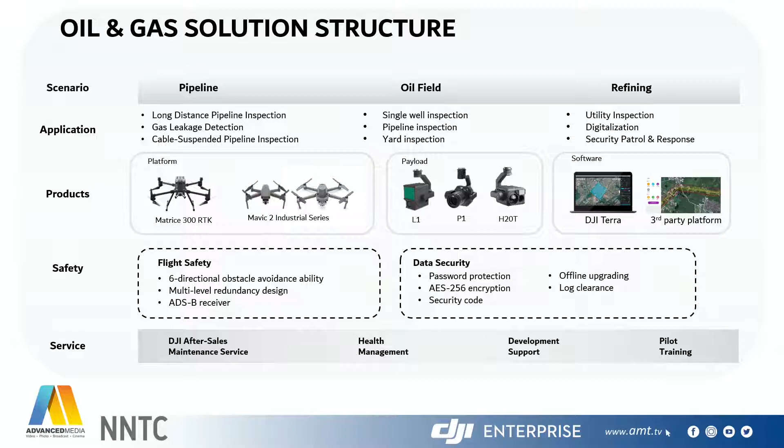So in these different solutions that we will be covering in the oil and gas field, we all know that there is a lot of scenarios that the drone can cover. So mainly we'll be focusing on one platform, which is the Matrice 300 RTK, that comes or that it's compatible with a lot of different payloads or sensors or cameras. And as well, we will be covering the different softwares, for example, the ones from DJI Terra for data reconstruction, and the one my colleague Pavel will speak about is Atlas, and UgCS.

Pavel, what is Atlas? Or UGCS in general?

Sure. So if we speak about two products which we actually use in drone solutions, there are two pieces, as you mentioned in the beginning. One is intended for flight planning and automation - that's the product called UGCS. It's a universal ground control station which allows you to pre-plan the flights in detail, and then in the field the pilot can execute the flight. The solution is centralized, so it can be used among big organizations with a lot of drones in operation at the same time. It also provides real-time video streaming to the command and control center to make sure supervisors can sit comfortably in an office and supervise what is going on in the field during operations.

And if we speak about the second piece, which is usually forgotten every time we speak about drones - once we collect the data, that can be a lot of data. Now the question is how this data will be processed, how we can quickly react on what we collected from the field with the drone. That can be a daunting task, because sometimes a drone lands and you have 15,000-20,000 images collected from the inspection object. So Atlas is an AI platform which basically allows you to process the images, stitch them into maps, and then detect particular anomalies on these images.

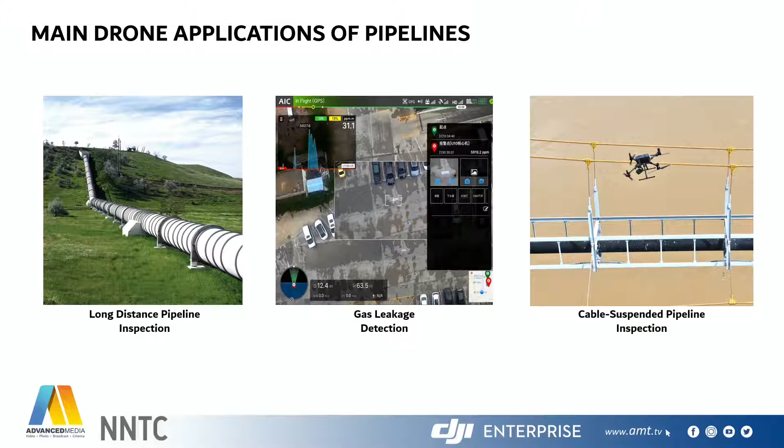We can have drone inspection to prevent any leakage from happening, thus preventing any natural disaster from oil leakage that can happen from the pipes. We also have gas leakage detection solutions, and in some cases pipelines are suspended like a bridge if there is a river crossing.

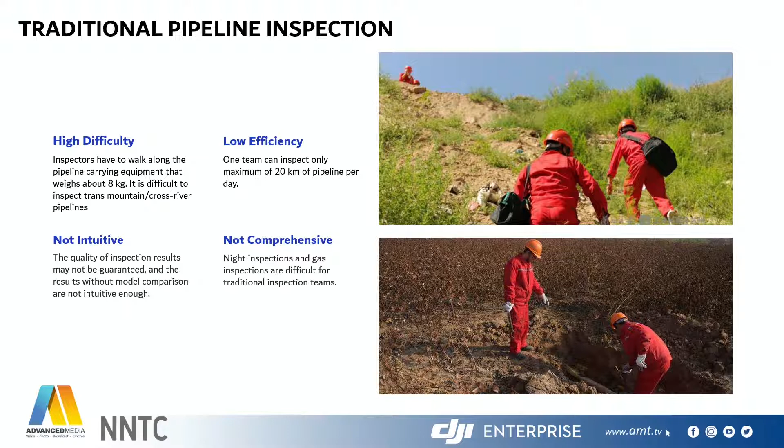What is the environment? Sometimes it's in the middle of the desert, which makes things way harder to do the inspection. Mountains too. So with the drone, it's really easy - you can just sit in your car, plan the mission, deploy the drone, and it will do the job automatically.

It's fully autonomous. So with drone inspection, you can cover up to 80 kilometers, and along with this you have a digital copy of the real world - a data archive. You collect the data and put it in your archive to compare results between one week and other weeks. The drone gives a very practical solution for long distance pipelines.

If we speak about pipeline inspections in general, that's what we've heard from customers not only in this region but in others too. The major issue with manual pipeline inspection, where people drive along it or maybe climb it, is first of all they don't see everything. They see a very limited amount of information from the pipeline, or it takes too much time to get everything. Another major issue is the documentation of faults.

A simple example: we are driving along the pipeline and suddenly we see something wrong. How do we document the issue? We basically stop, take pictures with a mobile phone or camera, and then later when we arrive back to base, we compile the report. The third thing is hazardous areas - mountains, wadis, rivers, and all these obstacles on the field require people to cross them, and that's not safe.

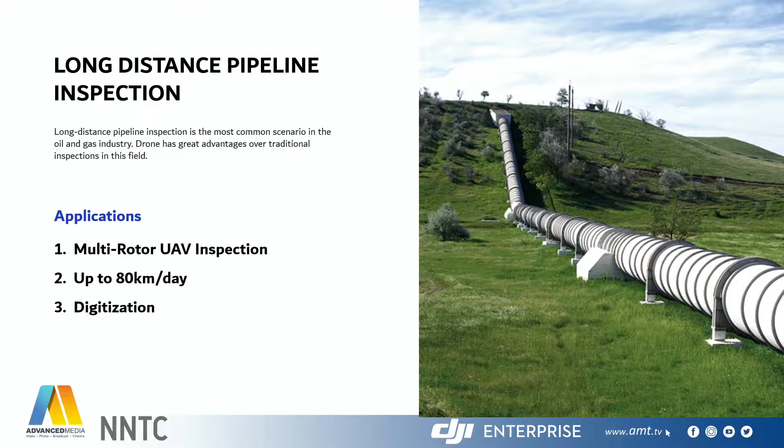But with drones, all these issues can be fixed. It's more easier and more practical, and it's faster. So here we have a scheme of pipeline distribution from the OGM to the port. All this distance can be covered with a drone.

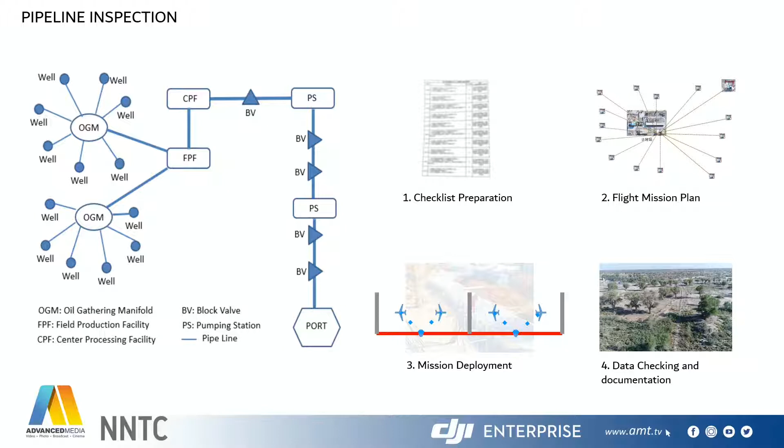You have to follow some steps. First, you prepare a checklist. Then you plan the mission using DJI Pilot or UGCS before you deploy it. Then you go to the location, deploy the drone, put it on the ground, and it takes off and starts taking pictures or gas readings, for example. After it finishes, a report is generated, whether it's for gas leakage detection or if you did data reconstruction as a 3D model.

In the pipeline site, the drone can also do a very important job. For example, here we have the M300, which can be equipped with the H20T. The H20T has a thermal camera along with an RGB zooming camera, with up to 200 hybrid zoom, 23 of which is optical. So here we're in the thermal view, you can see there's a heat point, and then you can switch to the RGB camera and zoom in to double check if there's something wrong at this heating point.

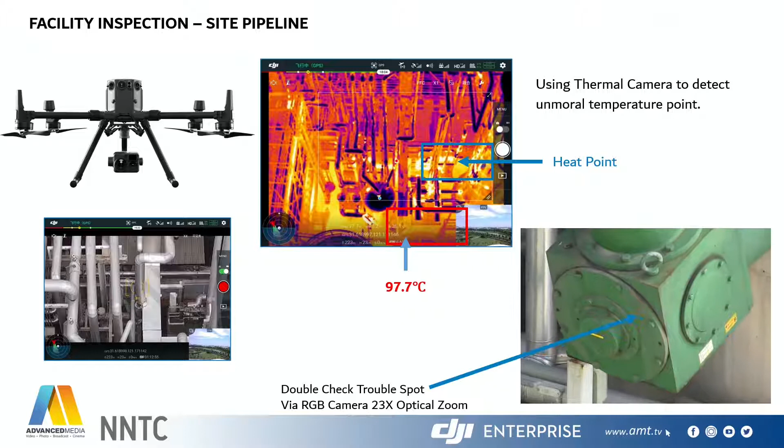Gas leakage detection is another important topic we have to cover, and the drone does a very good job here, because if there is a gas leakage, God forbid, it will be a disaster for the environment and for the manpower doing manual inspection. The drone can do this safely from a distance, flying above the pipelines at around 100 meters - a safe distance - and do the job easily, giving you the reading. I'll speak about the products in the next slides. It can give real-time readings, or after the drone mission is finished, you get a report with a full idea about the area you inspected.

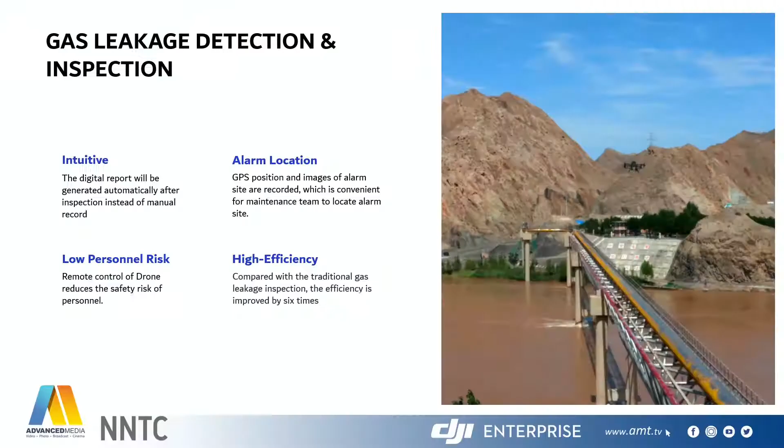One interesting solution which can be integrated with DJI drones and UgCS software is the oil spill detection camera. It's well known in the oil industry that oil spills have to be controlled. The oil spills happening on the water surface in offshore operations have to be controlled, and oil spill response teams have to act on them to collect the spilled oil. The biggest issue is that there aren't many technologies which can reliably detect oil spilled on the water surface. There are radars and infrared cameras, but they have very low detection rates and their own limitations.

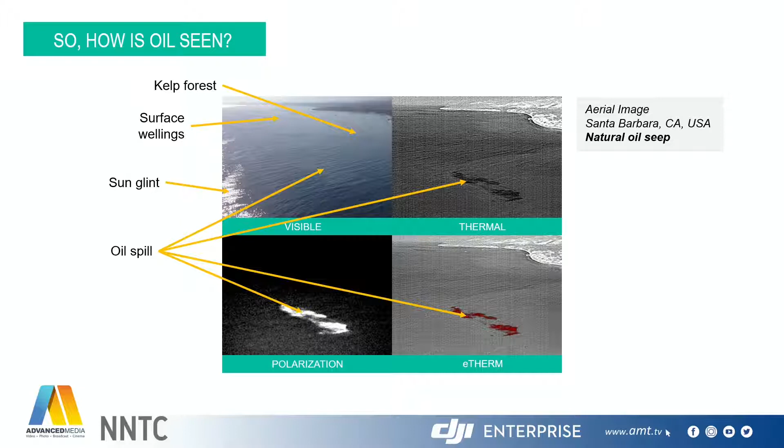From the polarization image, from the thermal polarimetry image, it's very specific. The advantage of the technology is that oil has a very specific polarization of thermal radiation, which allows us to distinguish it from other substances. That's why you see it as a very bright white spot on the water surface. We can definitely say that's a hydrocarbon - we can't say if it's kerosene or crude oil, but we can definitely say it's a hydrocarbon. Then there's a combined image where you can locate it.

So as a gas detection solution, you have two options. The first one is to fly the drone manually - it's up to your application. The other solution is to make the drone fly autonomously after you plan the mission. We have different solutions for gas detection, all compatible with the M300. I'll be speaking about it in the next slide.

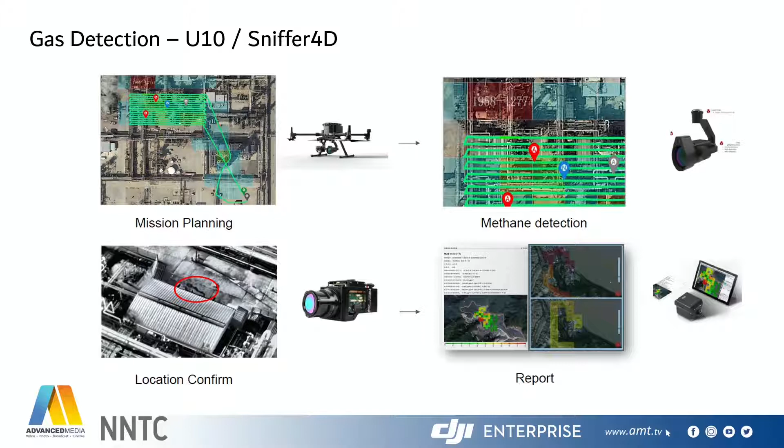So you plan the mission, the drone goes up and does the job automatically. Then if there's something wrong, you can locate it - you'll have the coordinates of the point where you suspect there's a problem, like a leakage. You can locate it and send someone to double check, and eventually you'll have the full report with the readings along the pipeline itself.

As a product we have the Sniffer 4D. The interesting thing about it is it can read up to 8 different gases at the same time - really interesting. For example, you can put H2S, VOC, CO, SO2, and so on. The Sniffer 4D can take a 4G dongle so you can connect it to the internet, then open your laptop, connect to software called Sniffer 4D Mapper, and you'll have real-time camera feed and real-time gas readings.

From the slide you can see a visualization of the readings integrated with a GIS map, showing the concentration of gas readings. The red color means there's a high level of gas at that certain point. So you have the full solution in this kind of product - it's really good and practical to have as a solution. Here we see technical details about the oil spill detection system.

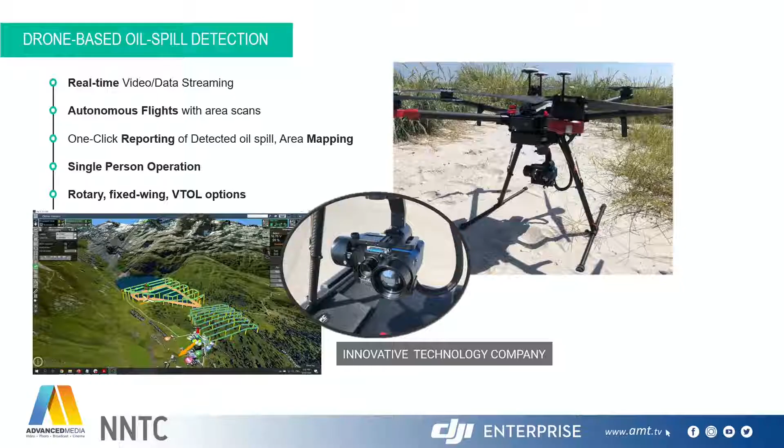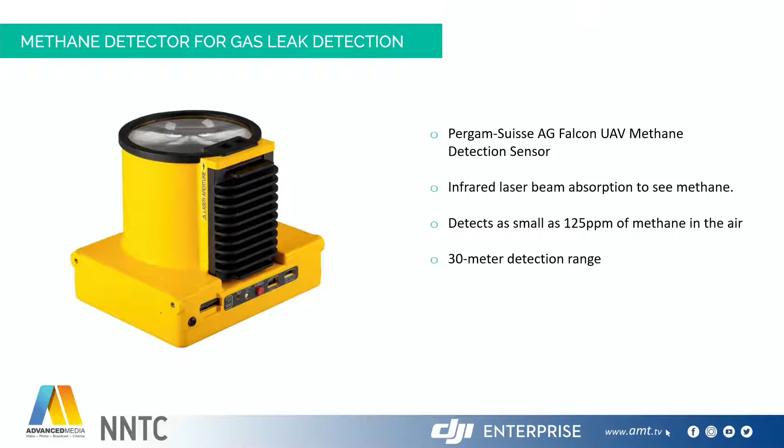Perfect. And the second one is basically a gas methane detector system, which is based on laser absorption technology. It can also be integrated with the M300 and UGCS together. So when the drone flies, this sensor can detect the concentration of methane gas at the point where it's targeted.

The last solution as a gas detector is the one from DJI. It's the U10. It's actually dedicated as well for CH4, methane gas.

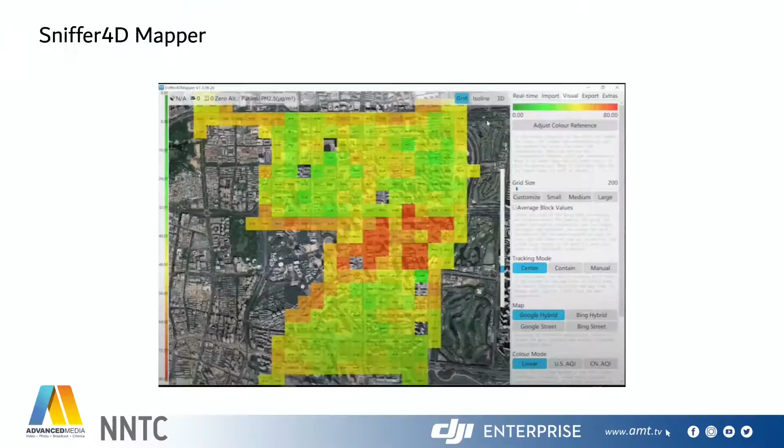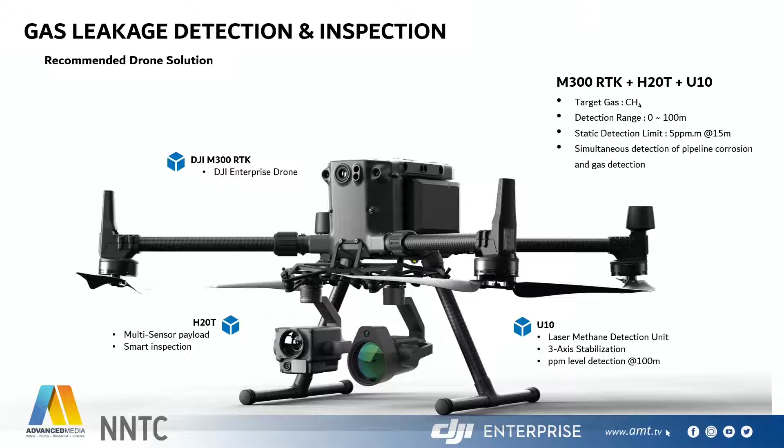So this is a good thing about the M300 for the U10. The U10 is dedicated for CH4, as I said, and the detection range is up to 100 meters. It's more than enough, and it's a safe distance from the pipes.

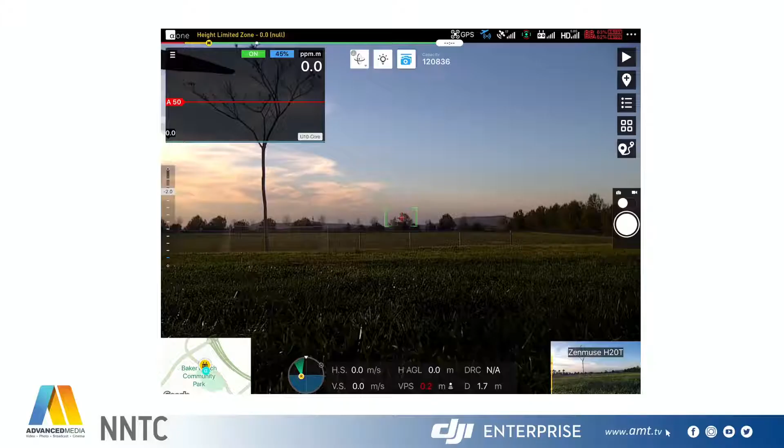So I want to show you a video about how the mission can be deployed autonomously. Let me play the video. So we planned the mission first.

This is using the application of the U10 called Alpha. So we planned the mission first, Alpha 1.

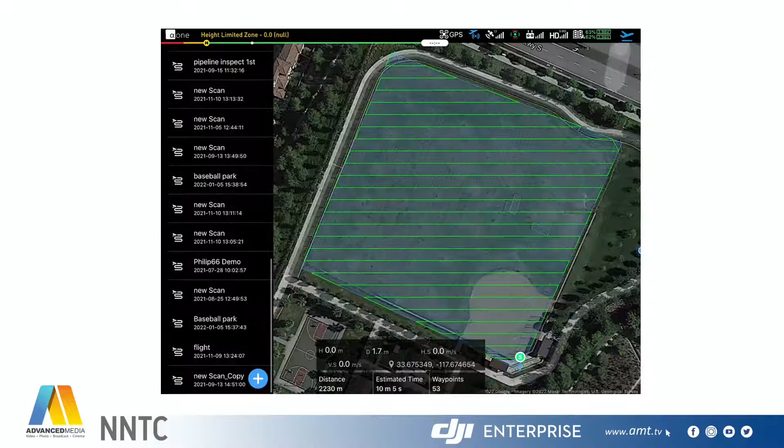So after we plan the mission, the drone will generate a path to follow, and we just enter the flight parameters here before we hit the start button, and the drone will take off and start following the path autonomously, fully autonomously. You don't have to do anything here. This is the path. You will have the real-time reading, and eventually a full report after the mission is finished. So here the drone is going to the starting point.

So sorry for this technical issue.

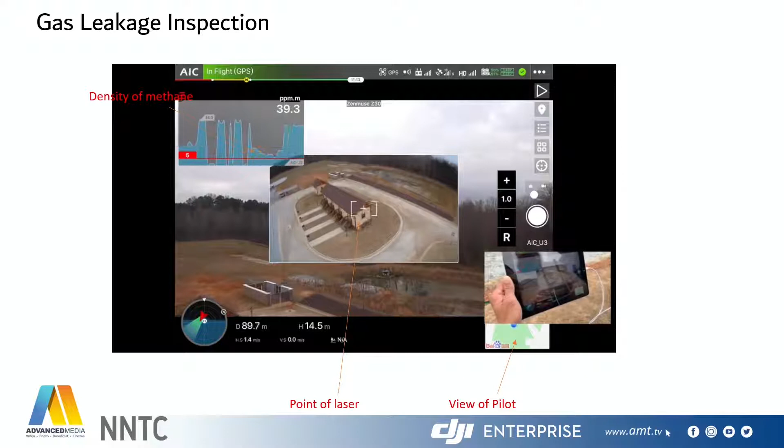Here's another video about how the real-time reading can be done with manual flying. So here we are flying the drone manually, and here we can see the point of the laser, and this chart is the real-time reading of the density of the methane.

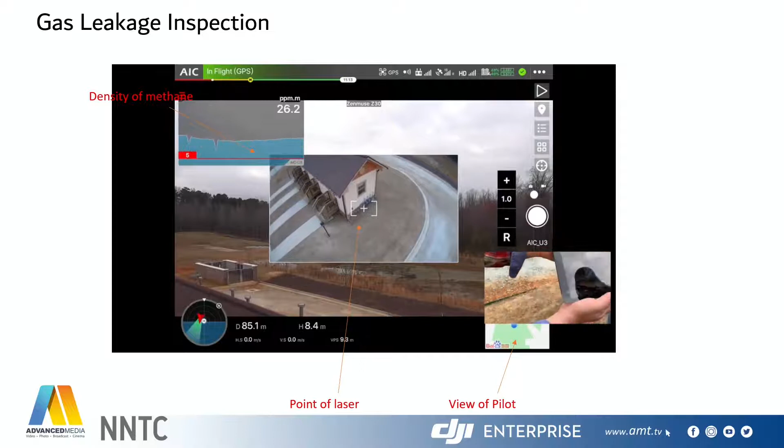So you have two options, it's up to your application. If it's something really small, you can just do it manually. If it's a long distance or a big area you want to inspect, you can plan the mission, and the drone will be doing the job automatically.

So what can be done with the gas detection sensor is you will have the real-time gas concentration reading. You will have the concentration curves and value displaying. And there's something I want to mention: you can put an alarm, for example a threshold value. If it's exceeded, an alarm will start beeping that there is a high level of gas at this point. And as I said, it's fully autonomous, up to your application.

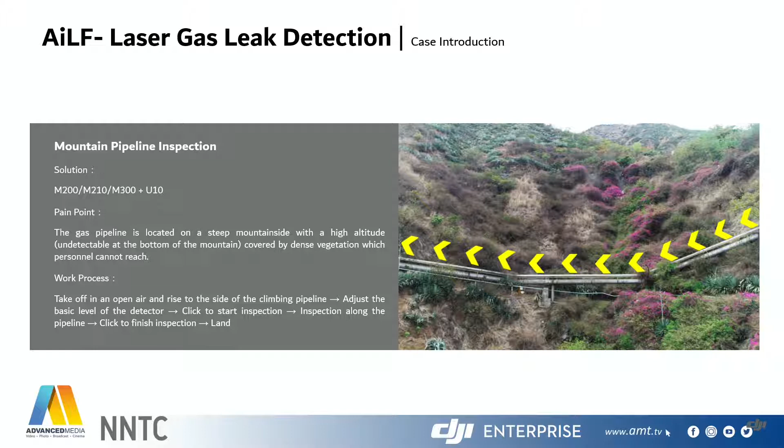A good example of this, if you can see the presentation, we have a case study where pipelines are located on a steep mountainside. Sharif, you can put up the presentation. Sometimes it's located on a steep mountainside, and most of the time it's fully covered by vegetation, hard to reach. So the drone can offer itself here—instead of sending manpower to a hard-to-reach area, the drone will fly from a safe side and do the job for you.

For the refinery as well, there are different applications you can have: utility inspection, digitalization if you did the photogrammetry mission for the station, and emergency response, where you can stream directly to the command center. So here is an example video I want to play about the tank field—if you want to inspect it, you can do it manually here.

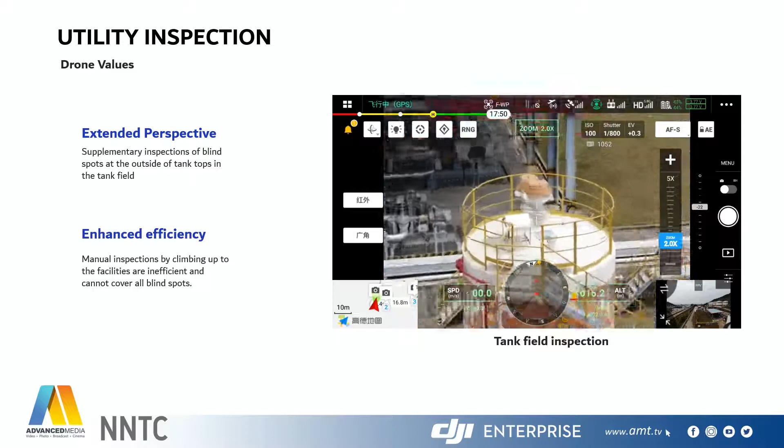You can fly the drone using the H20T. So this is the tank field. You can just fly the drone and zoom in, zoom out. As I mentioned, it has 200x zooming capability, and 23 of them are optical zooming, so there is no loss in resolution. From a safe side, you can fly the drone and just navigate and inspect.

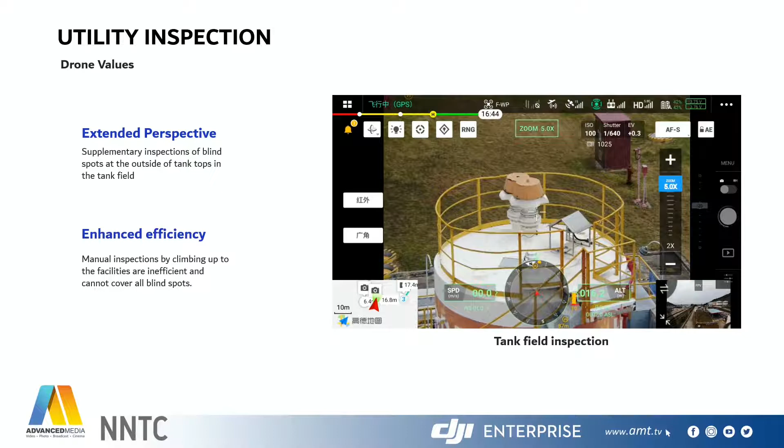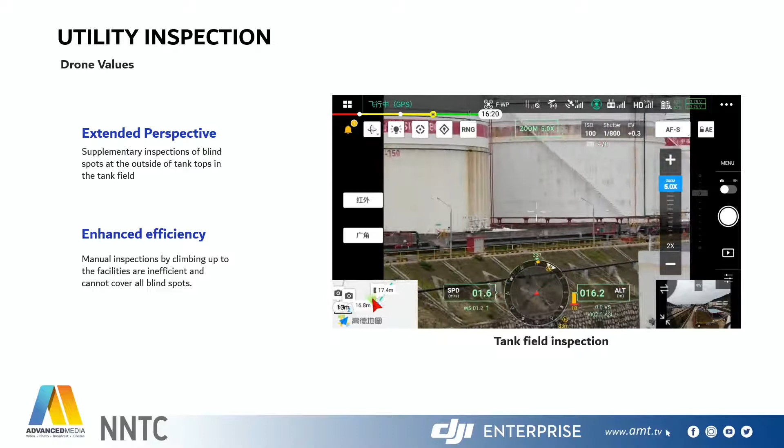I think we can add here that using UGCS, we can actually do very interesting inspection automation. We can scan the facility with LiDAR or photogrammetry, and put the 3D models into the UGCS application for future flight planning. Then you have the whole facility in 3D in order to pre-plan the mission and repeat these missions as often as you need.

It's like a routine, so you make it really routine. It's not manual anymore. So that makes routine inspections much faster.

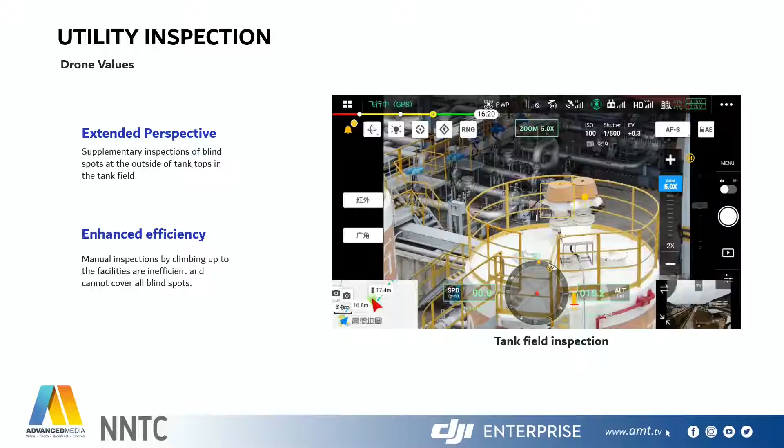And I think here, Pavel, we can use Atlas as well for the thermal detection, indeed, right? Indeed. Because the interesting thing about Atlas is that it can actually work with any type of imagery - visible, thermal, or multispectral - and we can train the system to detect, for example, hotspots on cooling devices, which helps process the imagery.

Again, when it comes to routine inspections, UGCS and Atlas, both applications, will help improve performance and make everything documented and well automated. It doesn't fit well for manual inspections you do once, but if you have something to inspect on a weekly or monthly basis, that's where we can really improve your results and save a lot of time and effort.

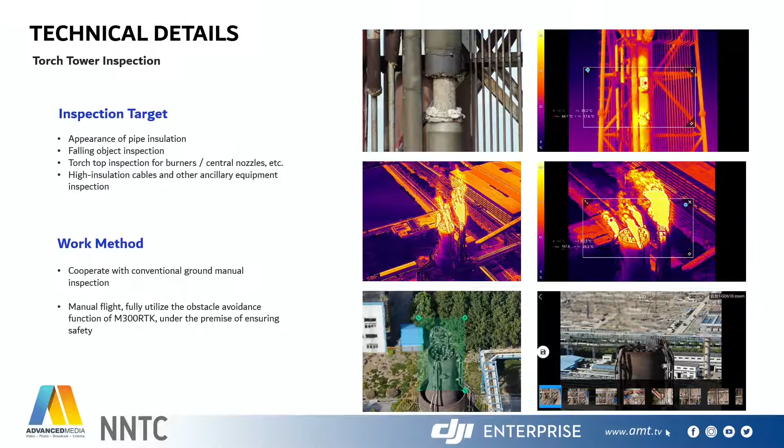For torch tower inspection, usually the traditional way is letting manpower climb these flares or the torch tower, and we have to turn off the flares. With drones, we don't have to do this. You don't have to turn off anything. You can just, from a safe distance, fly the drone and start the inspection process on these torch towers, taking measurements and analyzing as well.

Another example for the H20T is thermal or night pipeline inspection. Sometimes you need to do a night pipeline inspection, so the thermal camera proves itself here. We see in the slides these straight lines - you can see this is pipelines because of the high temperature. If there is any leakage, it will be obvious, because the thermal will be distributed at the point of the leakage, spread into the ground. So you'll notice there's something wrong, there might be a leakage, and you can send someone to double check it.

So GPR as well can play a very good role in oil and gas. Yeah, absolutely. So that's an interesting thing, right?

In oil and gas, pipelines and other infrastructure often run through places with uneven terrain. Typically, ground penetrating radar is mounted on a cart or trolley, pulled either by humans or by car over the ground to be inspected. In remote areas, there are no straight roads or pavement, there can be uneven terrain, and that really starts limiting GPR operations - the efficiency, the speed, and so on.

So drones and integration of GPR with a drone changes this game completely by doing two things. We integrate the GPR into the drone as a payload, and we integrate a true terrain-following sensor to the drone, which enables us to fly the drone at a height of just half a meter.

Those who know GPR technology well are probably aware that the lower the GPR is above the ground, the more efficient it is - that's a matter of energy dissipation. Now, with the capability to fly just half a meter above the ground and follow any uneven terrain, we can use GPRs in places where it was completely impossible before.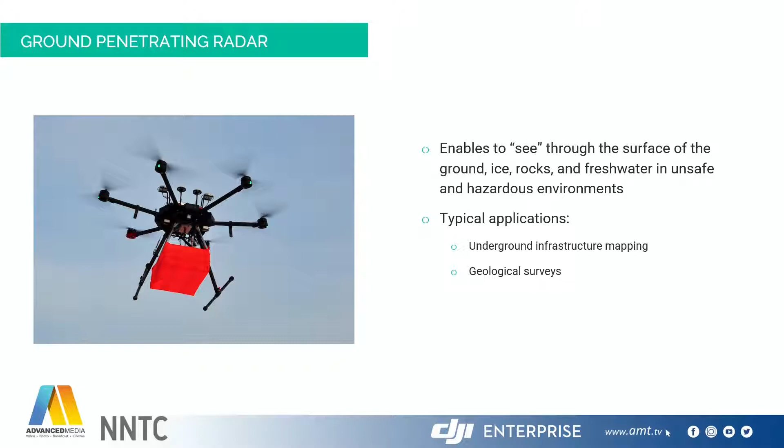Think about dunes, mountainous areas, and so on, where you literally can't fly the drone manually in any conditions. Another interesting thing is that for GPR to get the best results, you need constant flight speed. Imagine flying a drone manually over a steep slope and keeping the same speed against the slope - that's absolutely impossible for humans. It's really hard, but it's not impossible for automation. So with all these integrations, GPR becomes really important.

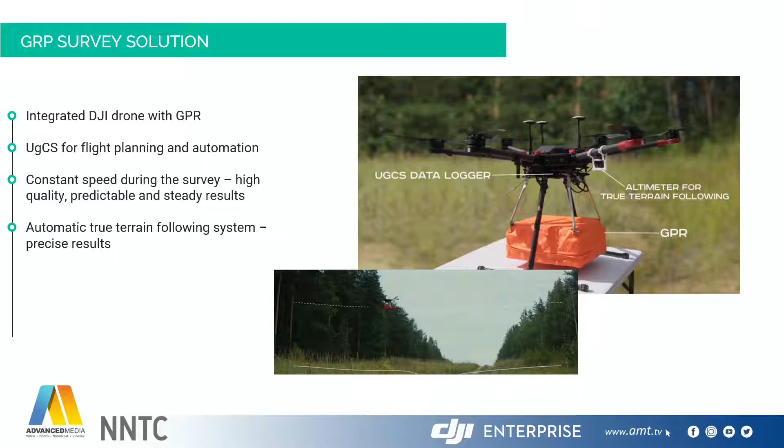So you will have the altimeter for terrain following along with the GPR - yes, they're both integrated. UGCS will keep exactly the altitude we need for GPR operation, and the data will be collected, so two things happen at once. And it is compatible with the Matrice 300 - yes, currently we fully support M300. That's just an example on this slide.

What you see is an example of pipeline inspection. This pipeline was laid down in one of the Baltic countries many years ago. There is obviously a pipeline plan, but unfortunately nobody knew exactly where the pipes were - they're somewhere in the area, but there was no precise data on how far from particular reference points. So a GPR was flown above the pipeline to scan the area, and we determined the exact location of the pipe with a precision of a few centimeters.

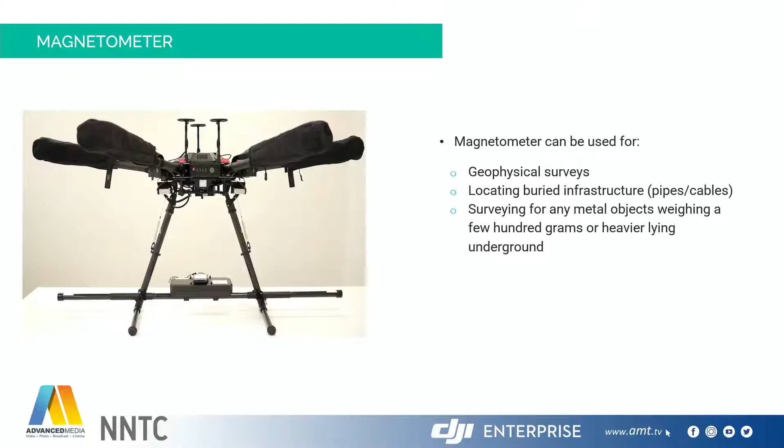That's how it helps in many cases. Another integration we provide is the magnetometer integration with the drone - exactly the same concept. We can keep constant altitude and constant flight speed, but now instead of ground penetrating radar, we use magnetometric surveys. That can be used for geophysical surveys, to find big metallic objects in the ground, and so on. There are a number of applications in the oil and gas industry too, which helps automate this service and make it much faster, increasing the solutions for this kind of field.

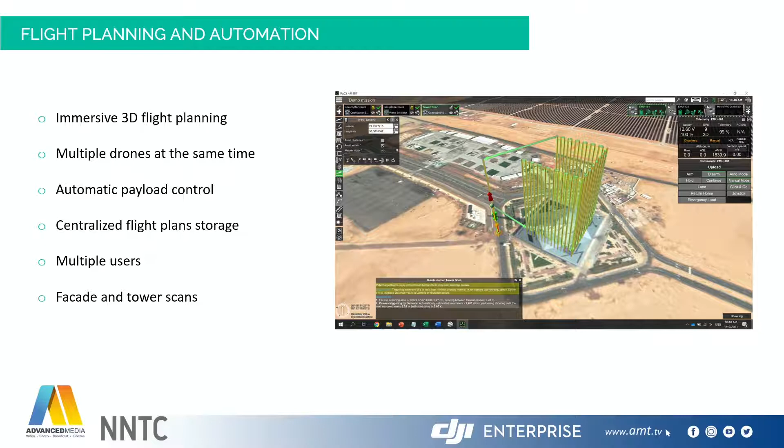That's an example of what we were speaking about in the previous slides. Sometimes you need to inspect objects which are high, for example flares, towers, high-rise tanks, or high-rise chemical reactors. Doing this manually as a routine basis is not an easy task, and the results are not consistent. What UGCS allows you to do is perform a 3D scan of the object and then plan a facade scan of it, automating the vertical flight against the object to get consistent photographic results of what we need to inspect.

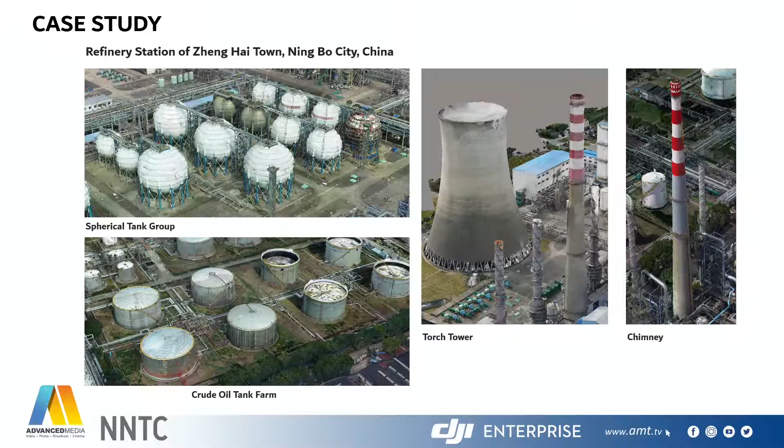Here are other examples: the torch tower, the chimney. So you have full control of the station as a copy on your laptop, whether it's for data collection, data archiving, studying, or analyzing - there are a lot of different applications for this kind of thing.

I can give one more real-world example from this region. Last year we finished a project with a local customer for an industrial object, a big plant around 1 by 1.5 kilometers, and we used DJI drones with UGCS to make a photogrammetric survey.

The subcontractor who was actually flying expected to complete this job in 3-4 days. With flight automation and proper flight planning, we completed the job in 4 hours. That's basically the big cost difference in terms of doing the job.

As a result, the customer now has a complete digital twin of the facilities. They can use it not only for future drone service, but on a daily basis for training, for simulation of processes, and so on. This is really something huge that the drone is offering.

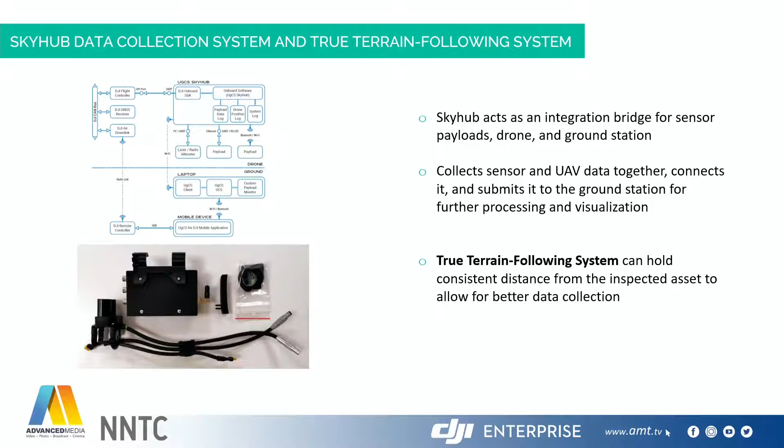What we do here also for M300 is a special system which we call SkyHub. SkyHub is basically the integration point for unusual, non-standard payloads. It's an onboard PC with a real true terrain following system attached, and it works as an interface between the DJI onboard SDK and custom payloads. That's how we integrate GPR, how we integrate magnetometers - the same way we integrate oil spill detection sensors and many other payloads.

One example from today we're speaking about oil and gas, but I have another example from the mining industry where we integrated an echo sounder using this approach, which helps companies provide bathymetric service of water bodies. There, it's important to understand the depths and the bottom profiles. With SkyHub and the true terrain following system, that can be done very precisely without actually doing bathymetric service physically with ropes or weights. That simplifies the operations big time.

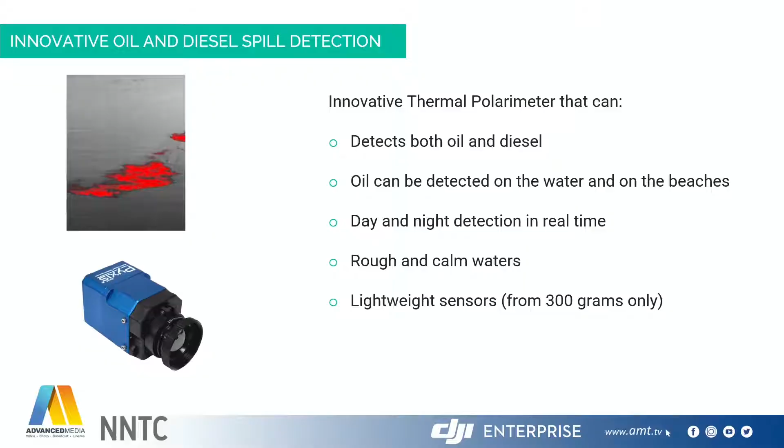So that's just another example of how integration of drones, DJI drones, and different payloads can help industries run the business better.

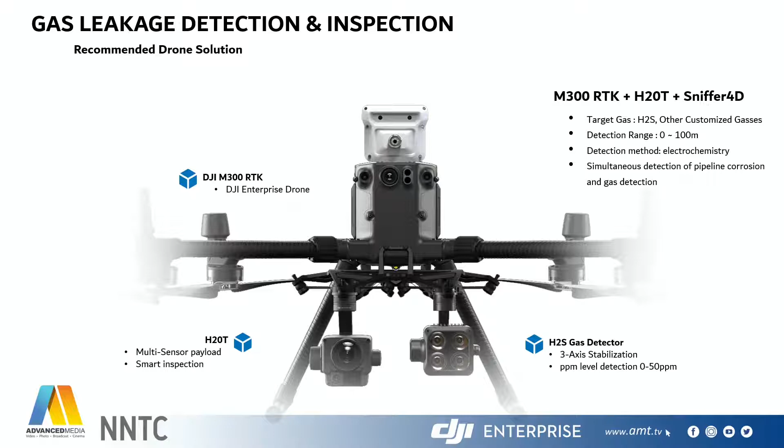Do we have a solution for H2S? Yes, actually there is the one I mentioned before, it's the Sniffer4D. You can customize it up to your application. As I said, you can put up to 8 different gases, and H2S is one of them, of course. So you can see here the target gas is H2S and other customized gases. It's up to your application, we can customize it. And you will have real-time reading, and as I mentioned before, you can connect it to software on your laptop and have real visualization integrated with a 2D map. So you will have a better idea about what is happening in this certain area or point, etc.

Is there any particular model of GPR to be used with the M300? Currently, we integrate a few specific models from a Latvian-based manufacturer, and there are a couple of different types of them. The shortwave, high-frequency ones, mainly for ground analysis, like to see what is under the sand or different types of soil. The other model is a low-frequency one to look into deeper places. For example, we used this long-wave technology in Greenland to find a World War II fighter which was lost in a glacier, found at a depth of 130 meters under the ice. So that's basically the current setup. And why we use this GPR - they are specific to drones because they're very small and lightweight, so it's not heavy, and the M300 can lift it.